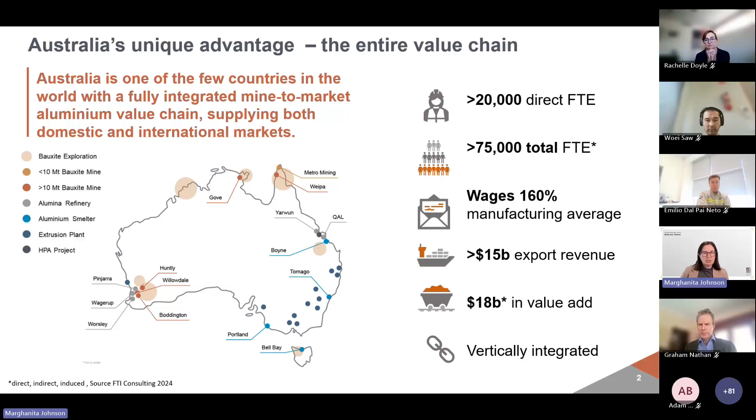First of all, a quick reminder of the vertically integrated aluminium chain that we have here in Australia. We have 6 bauxite mines, predominantly in Northern Australia and Southwest WA. We have 5 alumina refineries, 4 aluminium smelters and more than 20 extrusion presses. We also help employ and put food on the table for more than 75,000 people, families predominantly in regional Australia. I'm sure it's not news to anyone in this meeting today, but a quick reminder that our refineries are located in Gladstone and Southwest WA.

In terms of where we sit globally, aluminium is a really globally significant sector in terms of its global emissions. It's often considered the 3rd largest industrial sector in terms of emissions after steel and cement, and it's got over 1,000 million tonnes of carbon dioxide emissions every year. The International Aluminium Institute has done a lot of work at a sectoral level on their global pathways, and I really encourage you to look at their website to delve into that work more deeply. The primary aluminium production value chain from mine to market is energy intensive.

More than 60% of the global aluminium sector's emissions come from the production of electricity. The major source of non-electricity related emissions in the sector are fuel combustion in alumina refineries and smelter anode combustion. The third, much lower emission source, is recycling and resource efficiency.

Infinite recyclability without loss of properties is one of aluminium's unique benefits. Globally, the recycling of post-consumer scrap today mitigates the need for more than 40 million tonnes of primary aluminium production every year.

Globally, we've seen a lot of focus at a high level on Pathway 1, and we also have that here in Australia, obviously decarbonising our electricity. We've also seen, particularly in Europe, North America and parts of South America, a really high focus on Pathway number 3, the recycling pathway.

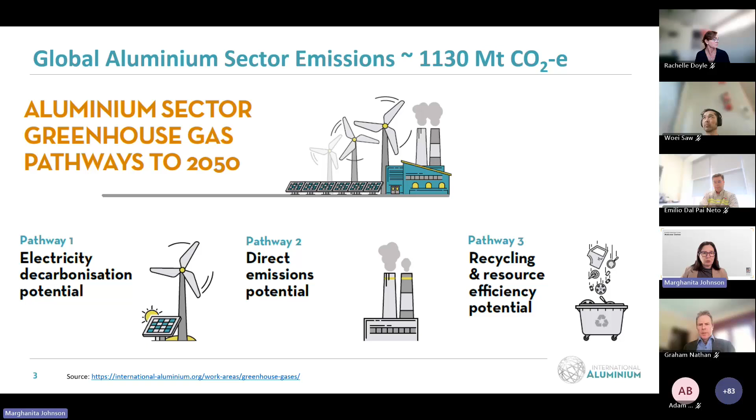Inert anodes, which some of you may have heard about, form part of Pathway 2. But for alumina decarbonisation, that's really part of the global sector's Pathway 2, and it's an important part in terms of where Australia comes in.

Australia is the world's largest producer of alumina outside of China, the world's second largest producer, and the largest exporter of alumina. We produce around 17 million tonnes of alumina a year, about 85% of which is exported, and 15% is turned into aluminium domestically. We have more than 60 years of technical experience in bauxite mining and alumina refining technologies.

This experience helps not only us, but also our customers across bauxite, alumina, and aluminium reach their sustainability goals. We also have the global research headquarters for alumina for Alcoa, Rio Tinto and South32's Worsley operations based here in Australia, which helps us develop new technologies as part of our global contribution.

All our members are also involved in the HILT CRC and all involved in the AlumiNEXT project, which was discussed later and is a really important opportunity for collaboration.

Our alumina is some of the world's lowest emissions alumina already as well. What you can see when you look at those graphics at the top is we're just under 3% of the global industry's emissions, but we're nearly 7% of national emissions, and hence the importance in Australia in terms of the focus we have.

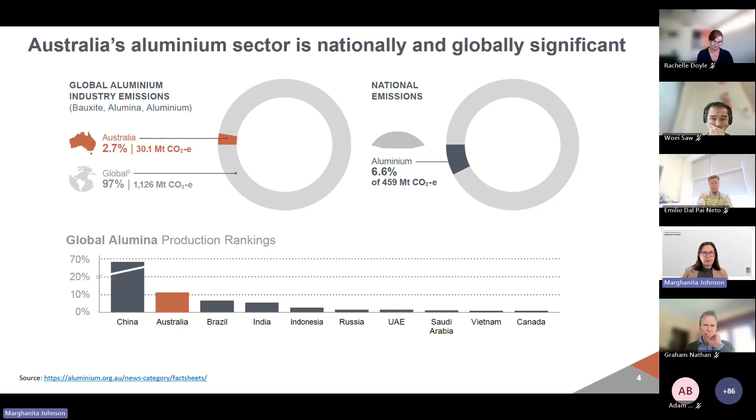As Australia, most people, when they think of aluminium emissions, they really turn to the primary aluminium rather than alumina. But because we're a very large producer of alumina, it forms a large part of our industry's footprint in Australia. So it's around 12.6 million tonnes, and this is very recently released 2025 data, or just above 40% of our total emissions footprint here in Australia.

I'm not going to try and explain the alumina process to the people on this call, you probably know an awful lot about that. But what I've included here is an extract from one of the fact sheets on our website where we outline what we think the emissions pathways and challenges are, and give a bit of a high level ranking to these.

It's important to note that around a third of the energy used in an alumina plant is for calcination and 2/3 is for digestion. In Australia, all our calcination is done using gas, and for digestion it's a mixture of gas and coal, which is why the percentage emissions don't align quite with the energy percentage.

That chart on the right, what you can see is the main pathways are electrification, alternate energy, and hydrogen. Electrification is by far the biggest opportunity. On the other two, briefly, cogeneration plants can be co-fired on biomass. Despite it being technically feasible, the volume of biomass in Australia is really the limiting thing. For hydrogen, we're certainly investigating the production and use of hydrogen, particularly for calcination, where the required temperatures are harder to achieve with electrification.

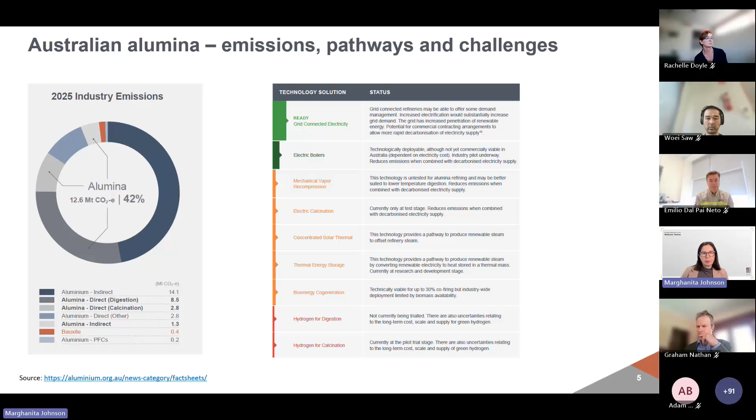Great. Thank you, Margie, and thank you all. Firstly, I'd like to start by also acknowledging that I'm part of a very big team here at the HILT CRC and Adelaide University, and hence some of the co-contributors are listed here. I'm going to give a bit of a technical overview of this challenge and opportunity that Margie has given a good introduction to.

Margie mentioned electrification is one of the important opportunities, and that's also one that our industry partners are focused on. The picture on the left shows the mix of primary energy sources across the globe on average that are used in the alumina refining process. You can see predominantly we've got fossil fuels being burnt, and Margie mentioned natural gas is typically used in the calciner, and both energy sources are used for the steam making process.

The key point is, if we look to the right, this figure shows that the average price of energy, if you just look at if we were going to directly replace the heat with electricity, it's going to cost more. This is because historically, electricity has been manufactured from heat by burning fossil fuels with efficiency of typically somewhere around 40 to 50%. So if we're just going to simply do a direct replacement with current technology, putting heat by resistive heating, it's going to cost more.

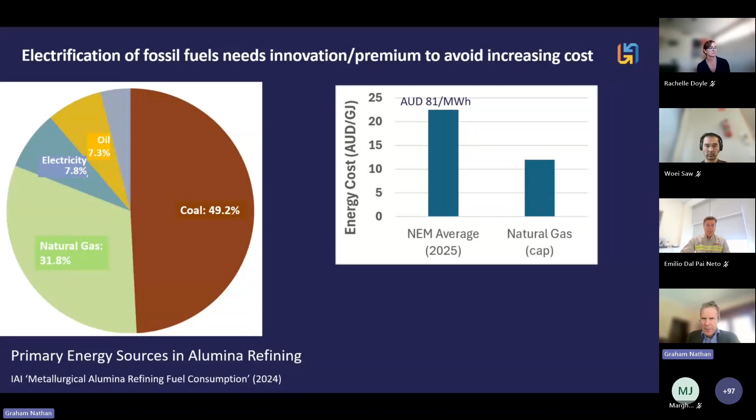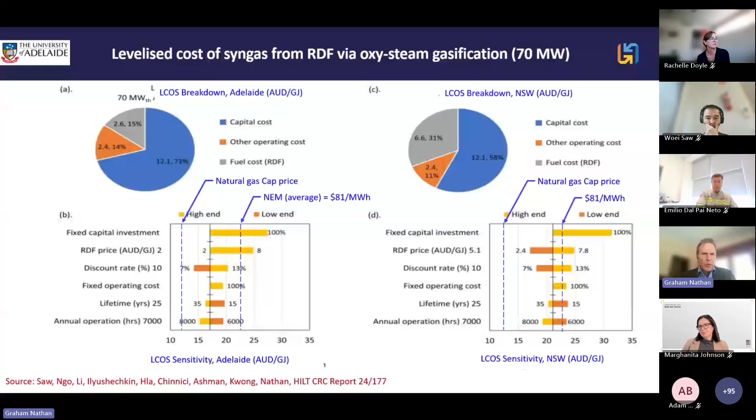So that means we need innovation. Also, there are other options, and this shows that compared with electricity, some of these alternatives, and Margie already mentioned things like biomass, although they're more expensive also than fossil fuels, they also can be relatively cost effective with electricity. So there's a number of all these options we're looking at in the HILT CRC.

Just to summarise those barriers and enablers, the key point is that there's an economic barrier. If we're simply going to do a one-to-one replacement of the current energy sources with the alternatives, we're going to add to cost compared to unmitigated fossil fuels. So this means we have to harness the opportunities of how to both improve performance.

So we don't just need to electrify, but we need to electrify in ways that improve efficiency. And also, although electricity on average is more expensive, during intermittent periods it can be lower cost, but to harness that we need to find ways to integrate the intermittent sources, which is why Margie also highlighted opportunities for things like thermal storage, which is also one of the opportunities. Of course, there are others such as alternative fuels and hybrid pathways that are also prospective, and we need to look at all of those.

In addition to those economic barriers, there are technical barriers, in that these technologies are not yet commercially available, and there's also market barriers and opportunities as well that I won't go into today.

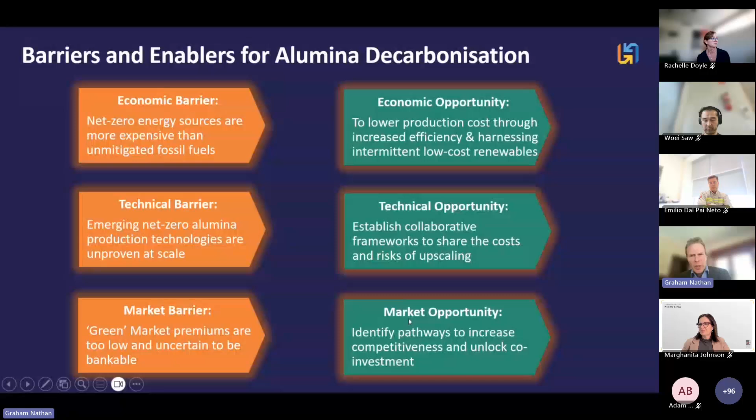So one of the key enablers that we're looking at, in terms of efficiency, is how to do better with circularity, and this is to recover things that are currently wasted and vented. So just to highlight this example, currently the digestion process is what is used to purify or separate the hydrate in the alumina from the impurities in the ore, and this is currently done with steam.

Currently we make that steam by burning fuel and air, and the steam then goes through this process and is vented. On the other hand, in our calcination reactor, it turns out that the hydrate ore or the bauxite actually has steam chemically bound to the hydrate. This is currently also vented at the outlet of our calcination reactor.

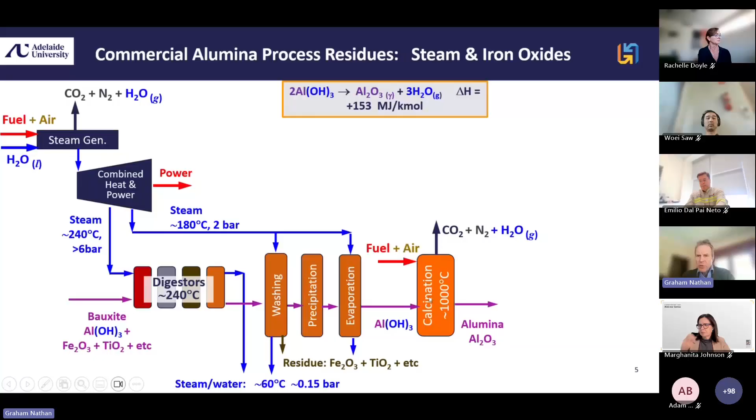So what we'd like to do is close this loop and do it more efficiently. We'd like to capture this steam that's released from the calcination process and bring it back to do this digestion, in a way that then avoids having to burn as much fuel or use as much electricity in this make-up process.

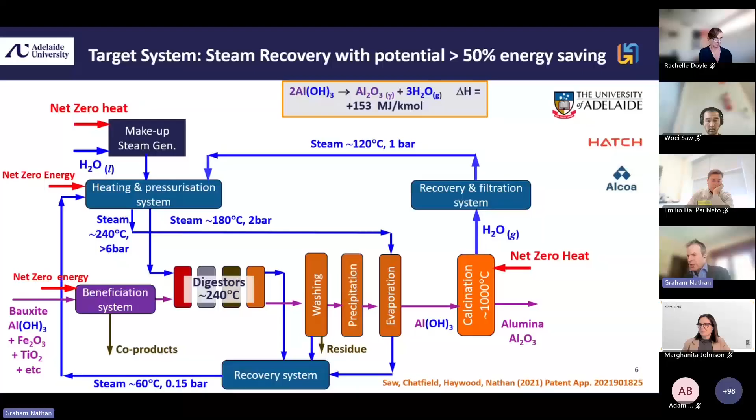So this is the kind of circularity opportunity that we're looking at trying to harness in the HILT process, and there's a whole lot of elements to that. But Saw will go into some of those in more detail. But of course, changing the alumina process is a very complex industrial process, and it doesn't happen in a single step and doesn't happen overnight.

So this shows the two main energy sources. On the one hand, we use fossil fuels to make steam in some kind of steam generator, and that goes through this Bayer process, and we also put fossil energy into the calciners. One of the things we're evaluating in the HILT CRC is the various steps in the industry transformation that will involve progressively changing from 100% fossil fuel utilisation, in steps where we gradually start replacing maybe some e-boilers in the first step, and then through to recovery of steam in mechanical vapor recompression and other progressive steps in changes in the industry process until we get to net zero.

So what we've been doing in the HILT CRC is developing some estimates of the timelines of what some of these technologies might be available, in consultation with our industry partners, to develop understanding of how the different energy requirements will be made and what the technology steps will be needed to go through this transition from where we are today through to 2050. So we can analyse how much energy would be required and what the economic costs of those would be. And the key point you see from this diagram, we're showing the energy requirements by category.

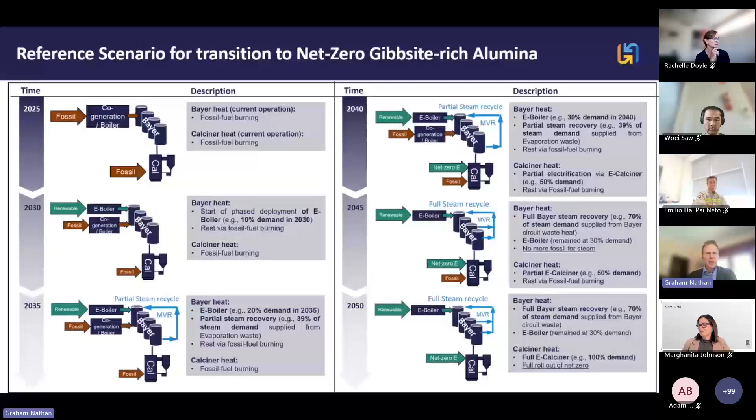You'll see that in this case, these blue lines are fossil fuel utilisation. Then we've got imported electricity. And you'll see that in this particular scenario, which is based on this diagram we saw here, because we can recover some of the steam that's currently vented and bring it back to displace the steam that's currently manufactured in the boilers through burning fossil fuels, this means that the net energy consumption to 2050 can potentially be reduced significantly. Depending on the scenario, some 30%, in this case around about a 30% reduction, more is possible, and we're looking at what those different options look like.

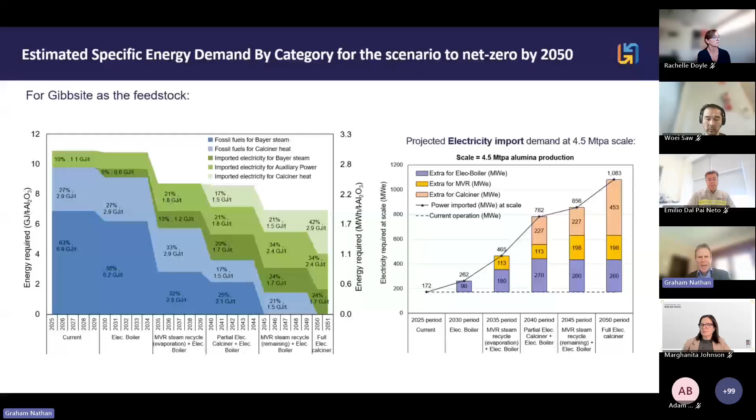So this provides an important mechanism to offset the otherwise higher cost of electrification. And this is made possible because we're not burning fossil fuels and diluting that steam with combustion products. So that gives us an economic opportunity, one of the ones you want to harness. The other one is things like integrating variability, such as the thermal energy storage options that I won't go into in detail today. So to give you an example of the economics, I won't go into this in detail, but...

We model all of those different steps in the process in detail, and these can be modelled economically, firstly with a process model, and then the economics can be accounted for. Here you can see this is one of the systems that can be used to recover steam from that calciner process. There's a cleanup system, and there's also a series of compression stages. These are more efficient than using boilers to do it, without going into the details.

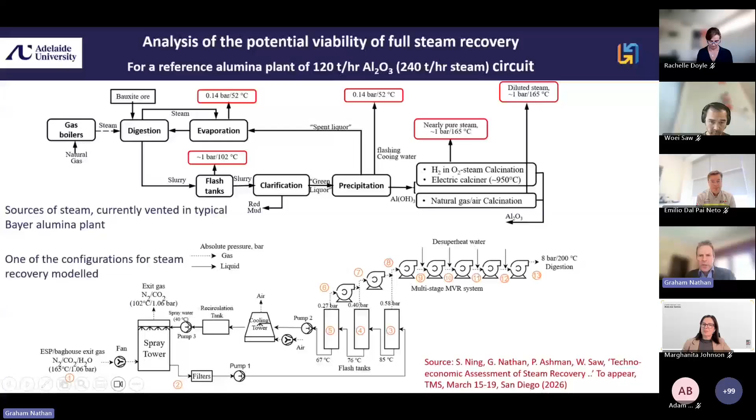So the key point is that by modelling those, you can see that one of these scenarios gives a break-even cost, shown in this red line, of approximately 60 or so US dollars per megawatt hour, which is about the same as the average price of electricity when you convert US dollars to Australian dollars. So this doesn't mean that the system is economic, because of course this is preliminary analysis, but what it does do is show the opportunities that can be made if we start doing smarter things than simply doing one-for-one replacement, by doing greater circularity and efficiency.

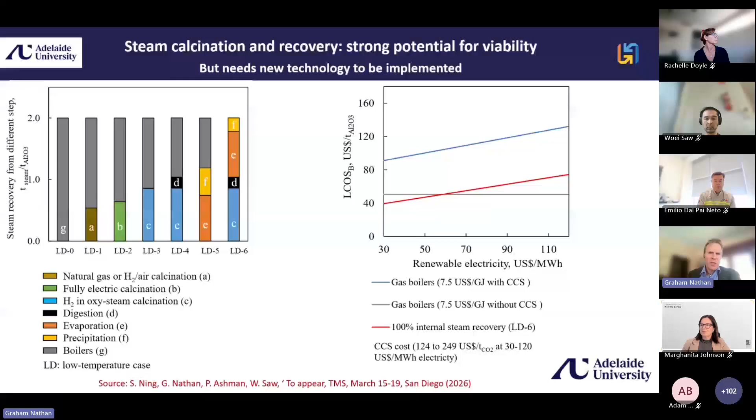So to summarise the key points of what we're looking at in the HILT CRC: we see that we need to make this transition economically attractive. We need innovation to enable this transition to net zero to be done economically. We need both innovative technology—part of that is in this increased process efficiency that I mentioned, together with things like the flexibility and circularity. Some of the technology platforms I didn't go into in detail, but they were illustrated, and Saw will talk a bit more—things like mechanical vapor recompression, thermal storage. There's also alternative fuels. But to do this, we need to look at the whole system, prospective systems, and this includes the alternative steam generation routes. There still will be some make-up steam required. We need the steam recovery paths that I mentioned, and also the flexibility.

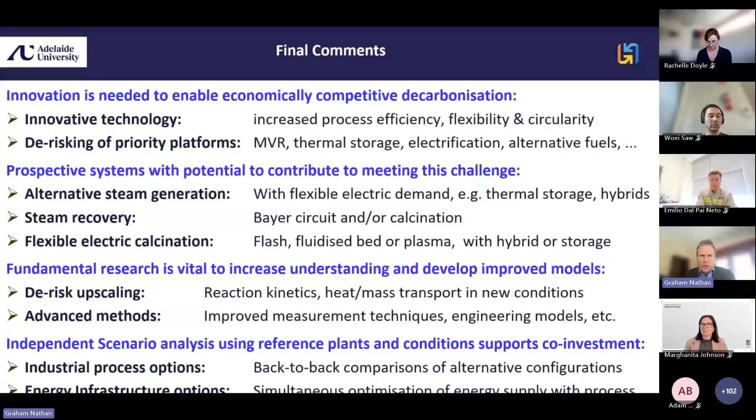But this needs to be supported by fundamental research, because these new reactors and systems will be operating in different environments. We need to do the fundamental research to de-risk the process of introducing these new technologies, which, whilst already in development, are still not yet commercially available. This also needs advanced measurements and the kind of scenario analysis I talked about, to evaluate the different economics, which helps inform industry and government, and to plan for the kind of additional energy infrastructure that Margie referred to. Obviously, if we can reduce total demand, it can make those kinds of things potentially more feasible.

So thank you. I'm going to stop sharing and hand over to Saw to talk about some of the details of what's been undertaken in the AlumiNEXT project.

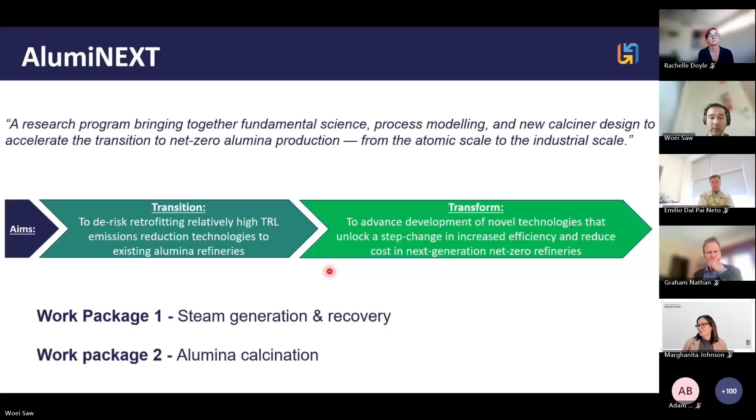When it comes to the fundamentals, we've got about 3 to 4 activities happening, undertaken by our research students, focusing on kinetic studies of steam calcination, physical properties of alumina, and physiochemical properties of alumina. I'll elaborate more in the upcoming slide. There's another program focusing on reactor upscaling, with one student looking at particle fluid dynamics, another student focusing on CFD modeling, and the last one looking at the next generation alumina calcination process.

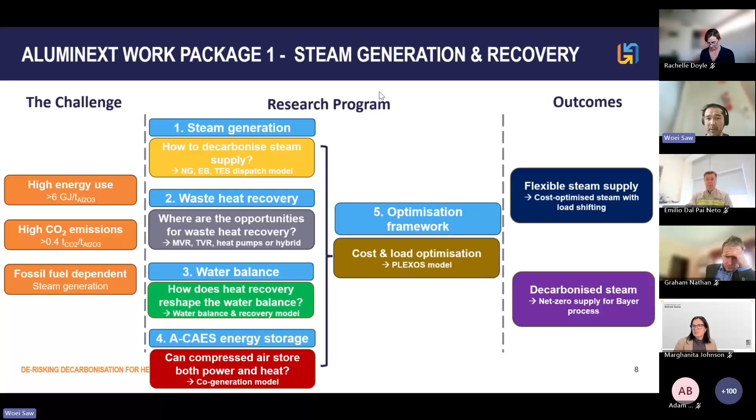The last one is the advanced compressed air energy storage system. We're looking at opportunities for how compressed air storage can potentially power both electricity and also provide heat for steam generation. A model will be generated from that particular work. Once you put that together, that information feeds into this optimization framework where we use the PLEXOS model to perform cost and load optimization. What we ultimately want is to provide flexible steam supply and decarbonized steam. Let me quickly go to the next slide.

These are the activities that Gus already highlighted before, without going into too much detail. I'd like to highlight that we have a quite comprehensive SysCAD process simulation of the entire Bayer process and also the calcination. Really appreciate the support provided by the SysCAD team. Gus already highlighted the modeling framework about how we can provide cost optimization and the load. Without going into details due to time constraints, I'll just highlight the bits and pieces we put together for how we came up with this HILT or AlumiNEXT system modeling framework.

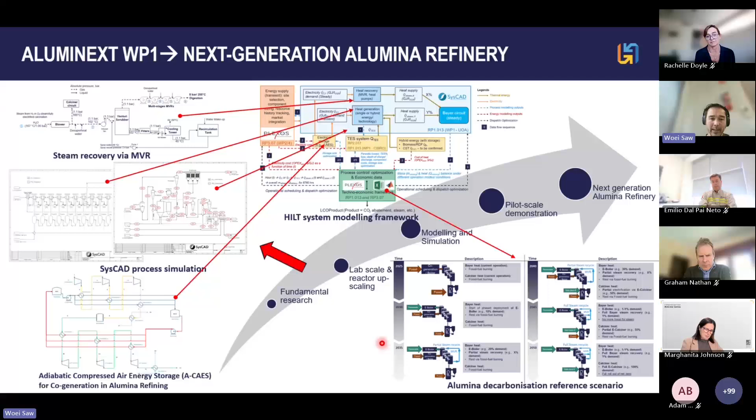The next part is work package 2, which is the next generation alumina calcination. Within this research program, as I highlighted before, we're focusing a lot on fundamental research, especially wanting to understand how the calcination temperature and atmosphere will impact alumina transformation. We have a PhD student focusing on the product quality and kinetics database for this activity.

There's another student focusing more on what drives particle breakage. This is an important question, especially related to the U value. The higher the particle breakage, the lower the U, which will also influence the downstream processes, especially the aluminum smelting process.

We also started to look at the atomic or molecular level, like how these OH bonds break during calcination. As Gus highlighted before, during alumina calcination, aluminum trihydrate decomposes into alumina and releases 3 moles of water. We can measure the weight loss changes during the transformation, but there are some mechanisms that cannot be measured through TGA or SEM type systems. That's why we're using molecular dynamic simulation to model that particular mechanism.

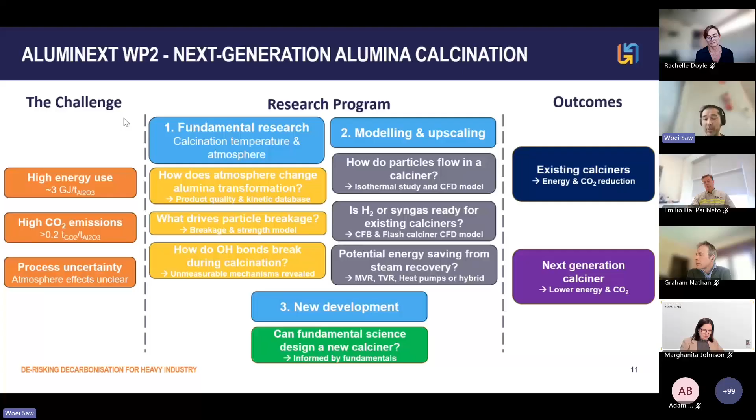All right, so this is kind of an overview because of the time constraint, so I can't really go into the details of each individual component. I'm summarizing a lot of the fundamental research work we are looking at, the lab scale reactor we talked about previously.

When you look at this particular drop tube, which is in the middle of the pictures here, it gives us a lot of different avenues for looking at the particle breakage, which is shown here. And then we are looking at this molecular dynamic simulation to look at the OH bond breaking. We also have some other CFD that's looking at the particle flow of the system.

And then we are currently looking at some of the energy balance of this electric calciner, which we heard a bit more about. We are trying to electrify some of the calcination process. So we are starting to better understand how we can put our effort into the particular process we wanted to focus on.

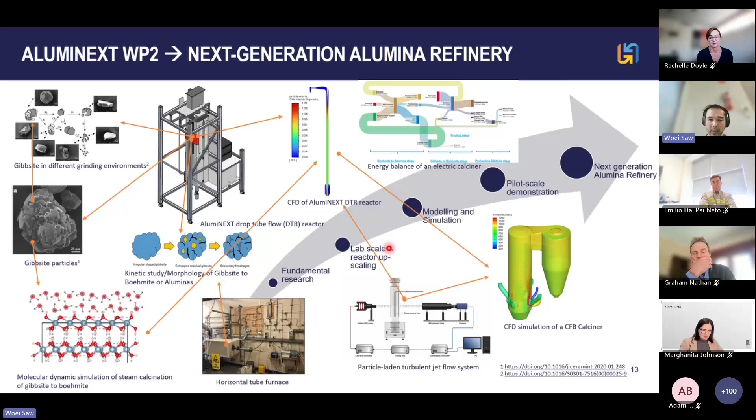I'm just conscious of the time, so now I'll quickly go through the drop tube reactor updates.

Really, why do we need this particular reactor? It's really giving us this understanding of how this net zero atmosphere will affect the calcination performance and product quality.

As we move into the electrification pathway, we get to literally tune the conditions that we probably might not be able to do in the conventional case, like burning natural gas, because usually we'll have the water and the CO2. Whereas for electrification, you can tune it whether you want it to be steam calcination or dry.

So why is it important? Certainly here we are trying to generate the kinetics, mass, and heat transport data to validate and inform literally our next generation calcination process. Within this drop tube system, we will be able to control the atmosphere, the temperature, and the residence time.

And then obviously this will enable us to do different systematic studies looking at the steam concentration, particle size, and also the temperature range.

Importantly, the results that we are getting from this drop tube reactor will be directly scalable, because the design we base it on looks at the dimensionless number that we are trying to match with the industrial operating regime.

So this experimental data will be able to validate the model for our literally next pilot scale that we'd like to focus on, which is after the AlumiNEXT, some of the work that we are currently undertaking.

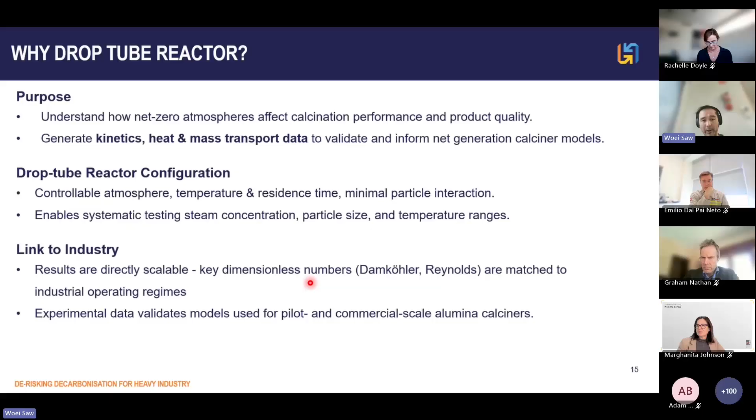Without going through too much detail, as I mentioned before, these are the dimensionless numbers that we're trying to identify for the right reaction and flow regime. As we highlighted, we are basing this on the dimensionless numbers of the Reynolds number and the Damkohler number.

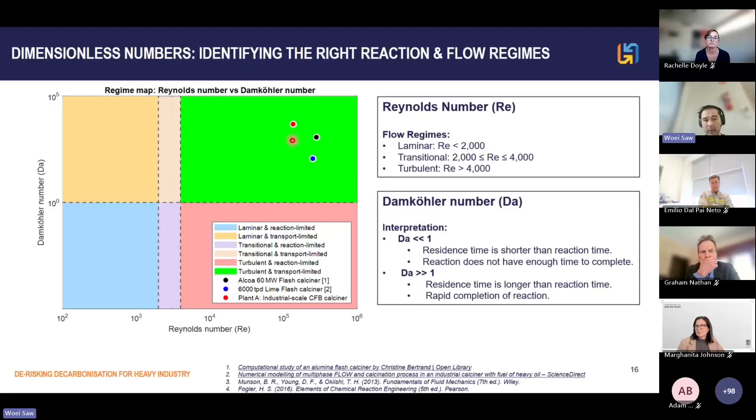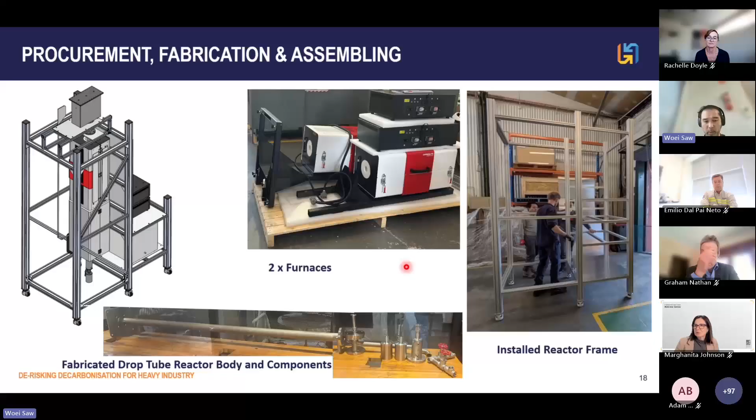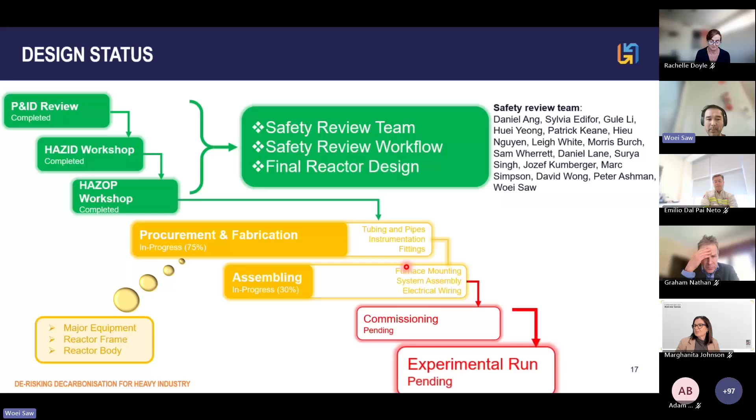Now we are in the phase of procurement, fabrication, and assembling. This slide gives you a quick glimpse of what we've constructed and installed - the reactor frame, the furnaces ready to be integrated into the frame, as well as the drop tube reactor body and components. We're nearly there, probably a month and a half away from commissioning. The team is working really hard behind the scenes trying to put everything together.

In terms of summary, I wanted to wrap it up. We have done quite a bit of steam generation work, and we're already looking at this particular optimization framework, in the process of establishing it. I think the research team has done quite a lot of different heat recovery pathway work, and we have models. Some of the configurations were already presented by Gus earlier on.

There is some work currently being undertaken in terms of the interim calcination kinetics and particle breakage data. We're using our existing reactor facilities while waiting for the drop tube reactor to be completed, which as I mentioned is under construction.

So what's next? I think commissioning is what we're going to prioritize over the next couple of months. After that, there will be quite a bit of work generated in terms of the kinetics and breakage model, water balance, process modeling, and lastly the electric calciner prototype development.

Again, because of time constraints, I won't be able to go into the details of each individual research project. But certainly there will be another opportunity where I'll invite some of the researchers to provide more information about some of the specific tasks highlighted here in this presentation.

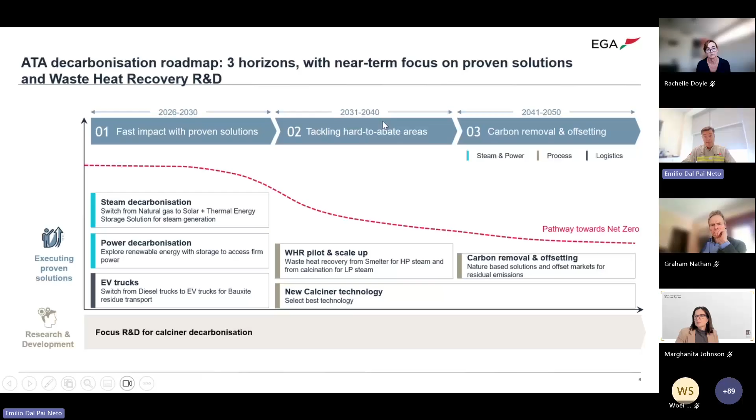In terms of electrical trucks, we are currently exploring electrical vehicles for transportation. We are at the stage of doing a pilot of electrical trucks. In this pilot, we will evaluate the charging time, the turnaround, and the efficiency of the batteries. We will explore swappable batteries to ensure we optimize the arrangement. Based on the success of the pilot, we have a plan to renew and replace the entire fleet.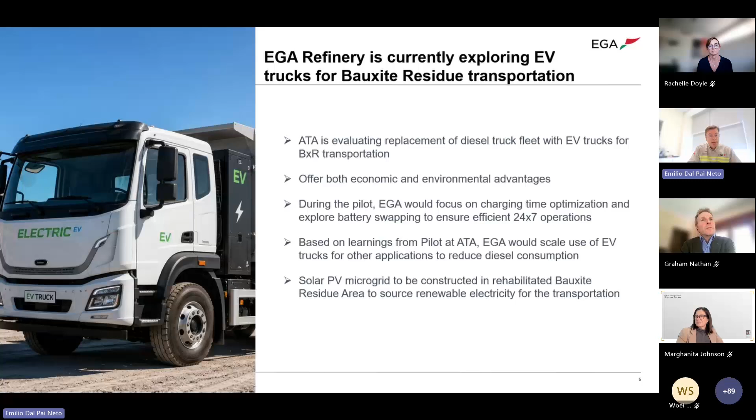In addition, the intention is to develop a solar photovoltaic microgrid in the rehabilitated bauxite residue areas to source energy for the trucks. This combines added value to a rehabilitated residue area with generating renewable energy to be used, reducing diesel consumption.

The other priority is the decarbonization of steam for the refinery. As I mentioned, we are concentrated on a few options. One option is solar, bringing electrons to the plant and storing them somehow in a thermal battery storage. But we also have the challenging option of using parabolic solar to produce steam directly and transport it to the plant. The challenge with this second option is that the area needs to be distant from the refinery, so it's a long-distance transportation of steam. We are evaluating both options to see which has the lowest risk and the most feasible arrangement. Basically, with the heat, we will generate steam for the refinery.

In parallel, we are exploring waste heat from the smelter. We have multiple pots in the smelter, and each of them normally generates waste heat that needs to be dealt with. We are exploring capturing this waste heat and bringing it to the refinery in combination with renewables.

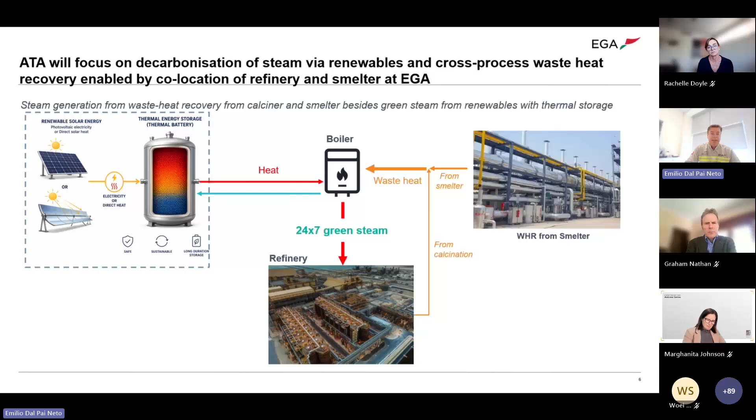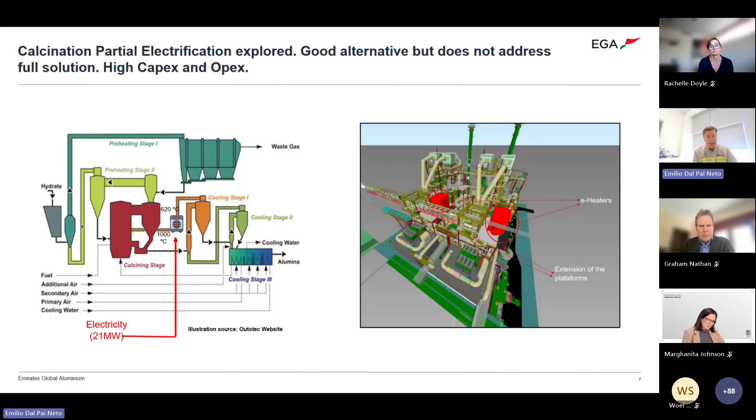The cost can sometimes be 10 to 15 times more than the cost of the equipment, so it's relatively high cost. It's still in evaluation that we are doing. But this brings us to a point: why not potentially go to a new calciner, something more simple, a new development with multiple choices and options. So we are now also in parallel looking at a new generation of calciner development, of course together with HILT CRC.

HILT CRC is vital to support us in this development. I'll share a little bit of vision or expectation of what we could offer as advantage. Understand that any new development needs a compelling business case. So what I'm sharing is more expectation, but we believe we could have something similar that could fit this new concept.

The idea is that we should have a calciner with zero combustion, completely eliminating the burner management system, excess air, and all controls associated with it.

We would like a calciner that is emission-free, reducing CO2 to zero. But on a calciner, we also need to look at NOx, SOx, and much less particulate emissions.

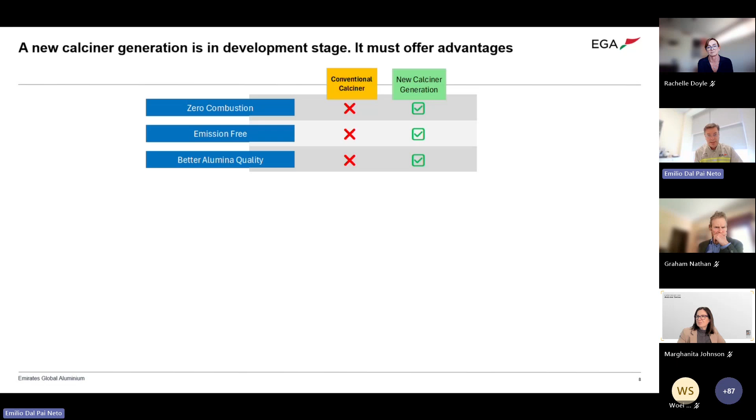In the new calciner, the quality of the alumina needs to be exactly the same as the starting point. But why not have better quality alumina? Why not minimize breakdowns in the calciner? Why not minimize alpha alumina? These are some questions we can use to challenge the group when designing any new calciner.

This new calciner needs to have better energy efficiency, definitely. If we're going to use renewable energy or any other source of energy, and if you're going to use more capital, you need more efficiency.

This new calciner should have preferences for heat export and steam export. If there is steam or heat available from the endothermic reaction of this calciner, why not use this steam in the plant? It makes a lot of sense and aligns well with HILT CRC goals.

The calciner is a source of water for the refineries. Sometimes people don't give this too much attention, but it's becoming much more important. Calciners generate water in the stack—why not capture this water and bring it to the refinery to minimize the water consumption required to operate the plant?

We would like a calciner with a lower footprint—more compact and much simpler. Sometimes it's more difficult to make things simple, but we need to think about how to do it. We should always look at the simple options in terms of CapEx and OpEx.

This calciner also needs to be thermal energy storage friendly, at least for our concept of using solar. The solar battery needs to have compatibility with it.

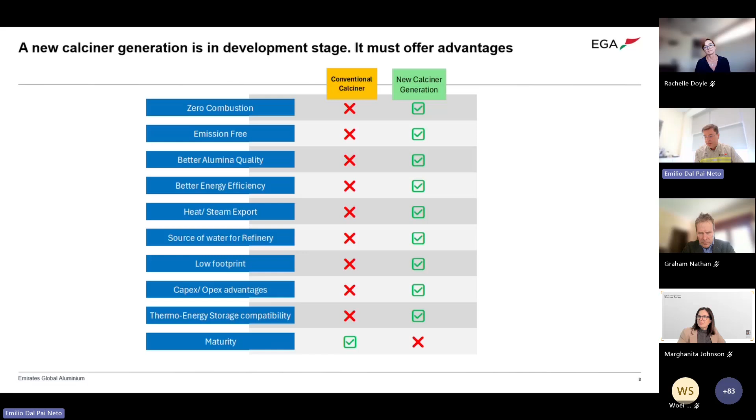Okay, that's it for me. Back to you, Rachelle.

Brilliant, thanks Emilio. We don't have any questions—the team have done a wonderful job explaining everything with perfect clarity. What we can reflect on is the power the AlumiNEXT project and collaboration through HILT brings: the ability for industry to articulate not just their challenges, but what the ideal solution or lighthouse looks like, which is what Emilio just did for us. If we don't set that lighthouse, we'll come up with solutions, but are they really giving us the step change? It's great to have that collaboration, industry input, and technical expertise in conjunction with research, which is what will give us these new solutions.